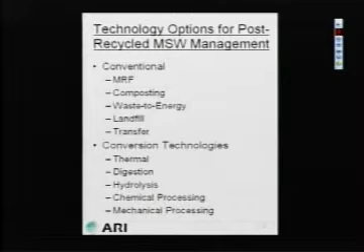Obviously, there are conventional means for managing municipal solid waste: recycling, composting, traditional waste-to-energy, landfill, transfer. And then we've listed the conversion technologies and the categories that we utilize to describe them: thermal, digestion, being anaerobic digestion, which is our focus there, hydrolysis, chemical processing, and mechanical processing. And this slide just tries to describe in a general sense what we mean by those categories.

So in the case, for example, of thermal conversion, we're looking at the application of heat to break down the waste and ultimately produce a synthesis gas, typically in a reduced oxygen or starved oxygen environment. And then the syngas can either be used as a material to make a fuel, or it can be combusted to make electricity. And typically the ash that's left over is vitrified, or it's a char, and that prevents leaching of metals if the vitrified material were used in an open environment.

Digestion, aerobic and anaerobic. Our focus has been on anaerobic digestion, which essentially is digestion, again, with a lack of oxygen. And we have more interest in that than the aerobic digestion process when we're looking at mixed municipal waste, because essentially it produces a biogas and less quantity of compost material for which you need to find a market.

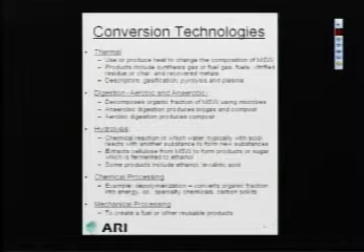Most of our discussion today is focused, by the way, on managing mixed municipal solid waste. We're not talking about food waste. We're not talking about green waste. Hydrolysis is a process where you extract the cellulose that's in the waste and convert it, typically in an acid hydrolysis process, to a sugar. The sugar, in turn, can be fermented into ethanol or other products. And then there are various chemical and mechanical processing means for separation of the waste and production of materials.

Just to give you an idea, there are many companies that are active in this business now. And we've categorized those companies, again, in terms of the thermal category, biological, chemical, hydrolysis, and other. This isn't meant to be an all-inclusive list, but it's the names that you'll see over and over again when you look at projects that are ongoing throughout the United States. Some of these technologies have commercial facilities operating overseas. Some have pilot or demonstration facilities, some of which are operating in the U.S., some overseas.

Why are public clients, at least the public clients that we're working with, considering conversion technologies? They're looking for environmental benefits, including reduction in air emissions, and in particular greenhouse gas emissions. They're looking to find enhanced use of materials, which results in less waste ultimately requiring landfilling. And they're looking for production of renewable products that have strong year-round markets, such as energy, electricity, gas, and fuels.

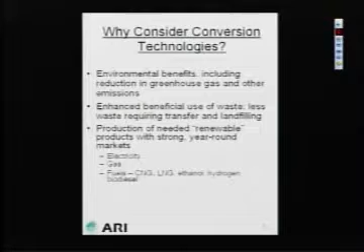This slide is a compilation of work that we've done in the projects in New York, LA County, and a little bit in Santa Barbara. And it is an example of some of the companies that have reference facilities. Again, some of these are commercial facilities, such as the anaerobic digestion list, which are commercial facilities but operating overseas. The gasification facilities are a mix of some commercial facilities and some demonstration or pilot facilities operating overseas.

And we've broken the thermal into 3 different types of gasification: just gasification in general, pyrolysis, and plasma arc. We'll get into that a bit more later. So it's important to recognize there are operating facilities commercially overseas.

There's always a question whether the waste that they're managing is exactly the same as the waste you'd see in the United States or in California. There's always a question as to whether the standards are the same environmentally as you would see in the United States. But there are actual operating commercial facilities. And also overseas, price is not always as low as you see in the U.S. for processing waste. But they are operating.

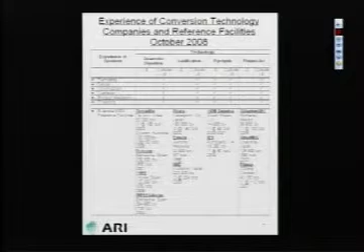It kind of reminds me, I've been in this business since the late 70s, early 80s, of a point in our history where we're looking now at introducing perhaps technologies that have evolved overseas into the U.S. In the late 70s and early 80s, when waste-to-energy technologies were first getting started in the U.S., it took some time to bring them in, and they came in, and then they developed, and there are 100 facilities or so operating now in the U.S. Perhaps we're at a similar point now when we're looking at conversion technology and bringing some of that technology into the U.S.

One of the benefits, again, landfill diversion. If you look at, again, the 2 categories, thermal and anaerobic digestion, typically the data that we have indicates that the amount of waste that you divert on a weight basis for the gasification processes is typically greater than 90% by weight. For the biological process, anaerobic digestion, typically they're in the 65 to 80 or 85% by weight basis. So if your goal is solely diversion from landfill, then probably you'd have a greater interest in the thermal conversion technology.

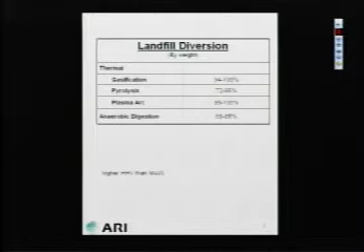In terms of net energy production, net energy being the amount of electricity that would be available for sale. So you generate a certain amount of gross electricity per ton of waste at your facility. You use a certain amount of that electricity to operate your facility, and the net electric output being the amount available for export and for sale. And these are the ranges of net electric output that we have been seeing from the data that we have. So on the gasification end, from about 400 kilowatt hours per ton.

Then you see a very high number on plasma arc, which is 1,250, but I have to caution you on that because that number is associated with a blended fuel, if you will, that has a much higher heating value than typical municipal solid waste. So it's not really a fair comparison on that slide. It's not that there's some magic in plasma arc that allows you to get that much more energy from the waste than some of the other gasification processes.

And part of the difficulty in looking at this data is that obviously the data has been gathered from facilities that operate on different waste streams. And so it's difficult sometimes to make sure you have an apples-to-apples comparison. And this is one example where the higher heating value of that fuel obviously affects dramatically the net electric output.

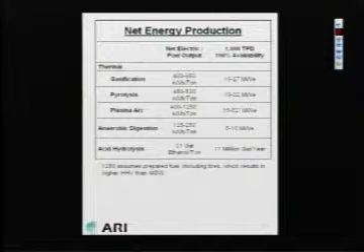Anaerobic digestion, you see that the net electric output drops off considerably. And acid hydrolysis, obviously, ethanol process. But again, if you're interested in renewable energy, the most efficient way of producing that from municipal waste, if you compare the thermal and anaerobic digestion processes, would be with the thermal processes.

We're doing a project in Massachusetts for the city of Taunton, and actually a request for proposals was released there last spring, and companies are now in the process of preparing proposals for a facility which will be a conversion technology type facility. But one of the things that we did for the Secretary of Environmental Affairs was to try and compare some of the emissions data that we had on thermal conversion technologies to the actual emissions data from municipal waste incinerators that are operating in Massachusetts now.

And municipal incineration in Massachusetts is very prevalent. Probably about half of the waste stream in Massachusetts goes through these 6 different incineration plants in the state. And typically what we found was that the dioxin emissions were up to 100 times, 2 orders of magnitude, less. Mercury, about the same, or in some cases up to 10 times less. Nitrogen oxides, approximately the same, in some cases up to 10 times less. Depends on the particular thermal technology you're looking at.

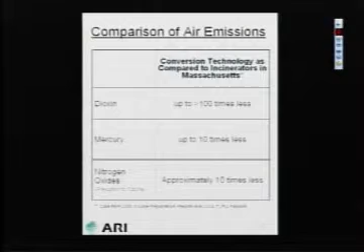But that's what we're looking at. So when people look at potential for better environmental emissions, they begin to focus on some of these particular emissions.

I wanted to spend a few minutes to give you a sense of what's going on based on our knowledge in terms of public initiatives in the United States. This is important to take a look at because probably 5 years ago, there were a lot of major entities in the United States, New York City, City of LA, LA County, the state here, that were just getting engaged and looking at conversion technology and doing evaluations of what might be available in terms of technology.

Several of those projects now have gotten beyond the study phase and have moved to the next phase of implementation, where companies have been shortlisted as qualified to respond to requests for qualifications or requests for proposals. Proposals in the case of the city of Los Angeles have been received. Offers in the case of the county of Los Angeles have been received and are being evaluated. So we're slowly moving beyond the study phase into an implementation phase, or the early stages of implementation.

This slide, I just focused on what we're aware of that's going on in California. LA County, 5 offers were received by the county in August. Currently, those are under review, and the county is looking to make a selection and to negotiate a project in the first quarter of 2009. Their concept was to match a conversion technology facility with a materials recycling facility or transfer station so that they could take the residuals from that recycling facility and run them through the conversion facility to further reduce the amount of waste that would go to landfill.

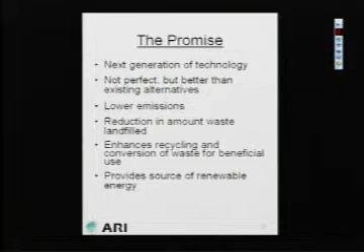So the promise could be the next generation of solid waste management technology. It's not perfect, but it appears to have promise of offering advantages to the existing alternatives in terms of lower emission, reduction in the amount of waste that ultimately you would need to landfill, and it enhances the recovery of materials for beneficial use. Many of these facilities have pre-processing facilities in front of the conversion process. And it does provide an opportunity for a source of renewable energy.

Some of the hurdles that we have seen: obviously, there isn't a commercial facility operating in the U.S. So public entities are somewhat reluctant to step out and be the first to invest either money or their prestige in putting together a facility like this. So a lot of the effort seems to be focused on doing demonstration facilities at a smaller level, and as confidence is gained in the performance of those demonstration facilities, moving on to a larger scale application.

We have found that there also at this point is some uncertainty on the regulatory side as to how these facilities should be permitted, what air emission regulations should apply in case of a thermal technology. Should they be treated like municipal waste combustors or not when you combust the gas from those facilities? On the solid waste side, how should the facility be categorized? Is it a recycling facility? Is it a thermal conversion facility? What regulations do we have in particular states that we'll use in the permitting process for those?

And we find, particularly in the East, that there's not a category of technology or a category in the regulations that specifically fits these technologies right now. Also, there's been some uncertainty in California as to how to define these technologies from a regulatory standpoint. It's also unclear on the East Coast as well as the West Coast as to whether these facilities should be eligible for diversion credits from landfilling, as well as whether they should be eligible for renewable energy credits.

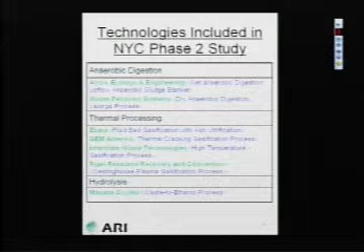The phase 2 study was an in-depth verification and validation of technical, environmental, and economic information from these companies. As I mentioned earlier, it was really the first and most in-depth attempt to get past that marketing hype, to begin to look at the mass and energy balances, to begin to understand what is going in and what is going out. Jim had mentioned earlier that there's a lot of inconsistencies in data out there.

You need to really understand what's the type of waste that's being handled. When companies talk about energy generation and diversion potential, are they talking about waste as received at the door, or are they talking about feedstock as prepared going into the unit? So these were some of the things that we were looking at in New York City.

From an economic standpoint, the city was looking at its future cost in the year 2014 when it envisioned a facility might be able to come online. And it looked at its projected export cost being on the order of $124 a ton at that point in time. So as we looked at the economics for these facilities, we looked at, could it compare advantageously to that?

For anaerobic digestion, we looked at both with and without the sale of compost, because for anaerobic digestion technologies, that is one of the issues that needs to be addressed. Is there a long-term, large, stable market for the sale of that compost material, particularly in the Northeast area? And those prices range from $56 to $80 a ton with the sale of compost, and a much higher cost if that compost had to be disposed.

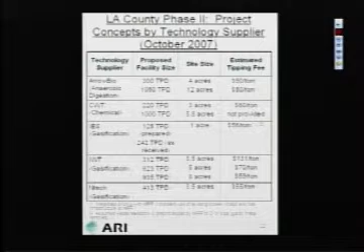And they also took a look at new technology suppliers that were not previously evaluated, again, holding all of them to the same standard. This represents the 5 companies that ultimately were selected and chose to participate. 9 companies were actually selected to participate, and after issuance of the request for information, 4 of them withdrew from the process. Again, following that review and evaluation process, 4 companies were shortlisted, and they're shown here: 1 anaerobic digestion company and 3 thermal companies.

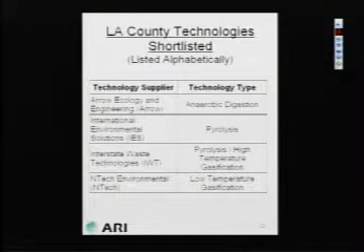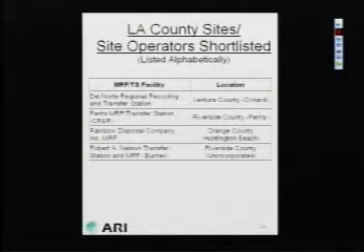Jim had mentioned that one of the unique features of Los Angeles County project was to consider the co-location of a conversion technology facility at an existing MRF or transfer station, in large part to take advantage of the synergies of that co-location and to further reduce the quantity of MRF residuals going to landfill disposal. This slide here represents the 4 MRFs that were shortlisted for consideration. In getting to that point of having 4 conversion technology suppliers and 4 MRFs, this outlines some of the key elements that the county looked at. Again, as I had mentioned earlier, we really needed to look at 3 main elements: the qualifications of the technology suppliers, together with the economics and the performance capabilities of the technologies.

In January of 2008, LA County issued its request for offers. The status of this slide is actually a little bit outdated. Offers were submitted in August of 2008. 5 offers were received, which represents offers from all 4 shortlisted companies, one of them submitting 2 offers. Those offers are currently under evaluation by an evaluation committee established by Los Angeles County, and the details on those will not be publicly available until that process is complete.

The next project of importance is the City and County of Santa Barbara. Santa Barbara actually started this process several years ago. They got to the point where they shortlisted several companies, and a project did not materialize at the time. What the City and County of Santa Barbara is looking to do is to divert waste from disposal at the Tajiguas landfill by placing a conversion technology facility at the landfill. The City and County are working collaboratively, and they started the process by establishing goals.

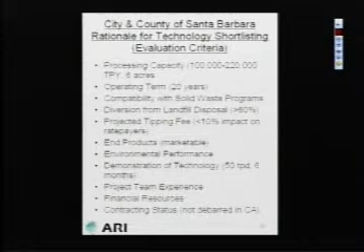They looked at the end markets, the products that would be produced and the markets for those products, environmental performance, demonstration of the technology. And finally, it looked very importantly at the project team and what the experience of that team was and their financial resources.

The next steps for Santa Barbara, as we mentioned, they're currently preparing their request for proposals and look to release that early next year. As they move forward in the preparation of that RFP, they're very active in a lot of side activities that go with that. They're looking to do an updated waste characterization study for the waste that goes to the Tajiguas landfill. They're looking to gather geotechnical information on the area where the project would be built.

And they're working very strongly with the local jurisdictions that might become part of this project. They're reaching out to the cities that use the landfill, which include Solvang and Buellton and Goleta, to find what their interest level is in this project and to educate them on these technologies and what this project might encompass. As they do that, they're holding public forums and educational seminars. They're meeting with environmental groups, and they've been doing this on an ongoing basis. So public outreach and education is a very important part and big part of the Santa Barbara project.

Proposals will be evaluated in the 2009 timeframe, with negotiations following that, leading into design, construction, startup, and operations. With that, I will turn it back to Jim, who's going to go through some representative photos of these facilities, and then we'll be available to answer any questions that you have.

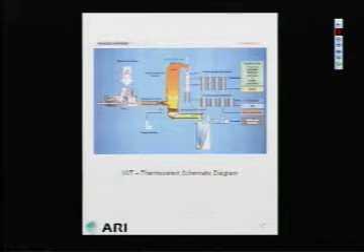I'm not going to go into this. That's a schematic of their process. This is not a plasma system. This is an example of the plasma system, using the Westinghouse gasification system in Japan. And this has processed over time municipal waste and auto shredder. We understand now it's primarily focused on auto shredder waste. It started operating in 2004.

This is an artist's rendition of Plasco, which is essentially a plasma system, and this was part of their proposal to the city of Los Angeles for a 200-ton per day facility. And I think the architect had a field day there when they came up with the look for that facility. So probably only in Los Angeles would you see a facility look like that which processes waste.

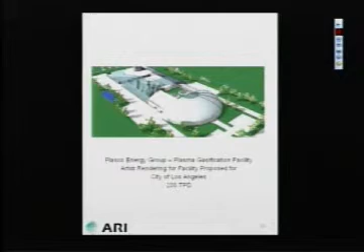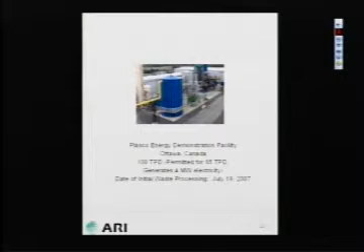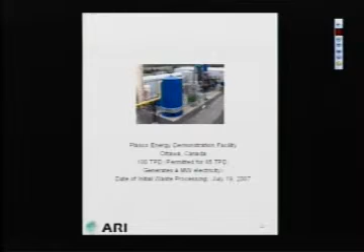Plasco operates a demonstration facility now in Ottawa, Canada, and it's just really begun to process municipal waste there within the last year. But they also process what I would call a prepared fuel, in that they mix the municipal waste with other waste materials. They've used tires in the past. They've used plastics, high concentrated waste plastics in the past. And they manufacture, if you will, a very high heating value fuel.

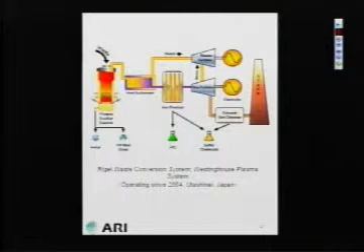This is just a schematic of what a system would look like. This was what was proposed as part of the New York City study for a plasma system, using, again, the Westinghouse setup. Shows a combined cycle system, a more efficient system for capturing the heat value of the waste than just the conventional steam system.

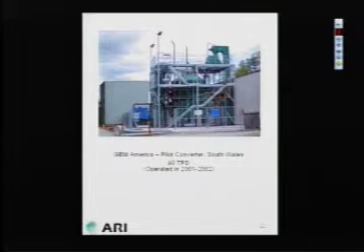Right here in California, in Romoland, you have company IES, which has put together a pilot facility at the 50-ton per day municipal solid waste size. Been operating on and off since 2005. It's a pyrolysis unit. It's a very simple setup, not in an enclosed building. It's set up as a pilot demonstration type facility.

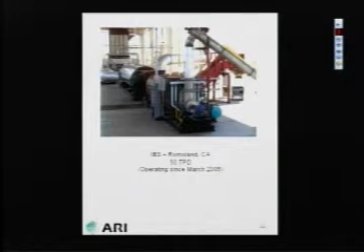And their intent was to gather intense data on air emissions to share with South Coast Air Quality Management District to demonstrate that they could meet all the conditions necessary to be permitted there for a commercial facility. A schematic of their process.

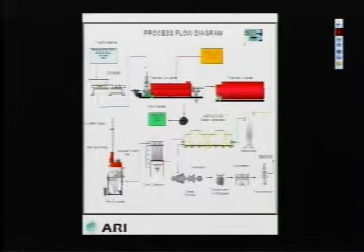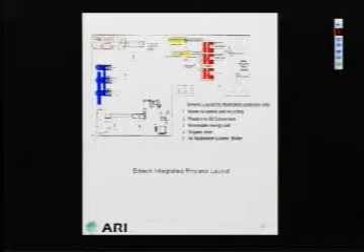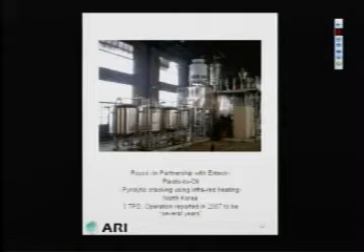Another gasification process, Entech, which is used overseas in the UK and Europe, is also in Asia. They use a front-end separation system for materials. This was what they call a kinetic streamer to separate materials. This was in the UK. We visited that. They also, which is kind of interesting, at the back end of their process, for the plastic that they recover, will convert that plastic into oil. We didn't visit this facility. This facility is in North Korea. We didn't have an opportunity to visit it.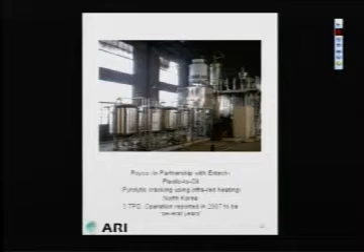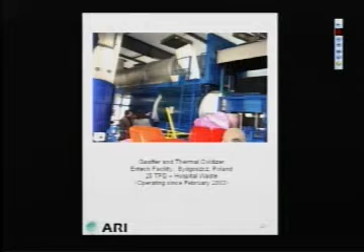This is just to show you the simplicity of a gasification system. This was the Entech gasifier that was used at a hospital waste facility in Poland. But you can see a 25-ton per day, small-scale facility. Served that hospital, also served to take the hospital waste from other hospitals within the region, so it was a regional facility. And they simply gasify in that first chamber where you see the two people standing in front.

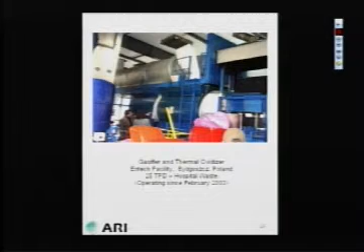And the gases are actually combusted in the chamber above. And then you have a steam heat recovery system that follows that, and typical air pollution control equipment. In Malaysia, they're operating a 67-ton per day gasifier on municipal solid waste.

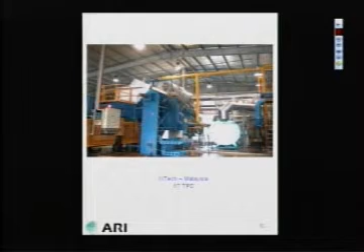Switching over to some of the biological systems, we did have an opportunity to visit the ArrowBio system, which is a wet processing system, which is outside of Tel Aviv in Israel. This is what they refer to as their demonstration facility. It's 110 tons per day on municipal waste. And for any of those who have visited Israel, they don't recycle to speak of in Israel on the home front. Very, very little. So when you have mixed municipal waste going to a facility like this, it's essentially all of what would be generated at the household.

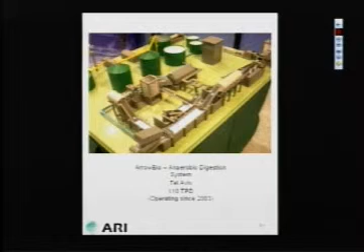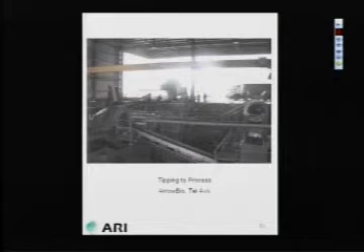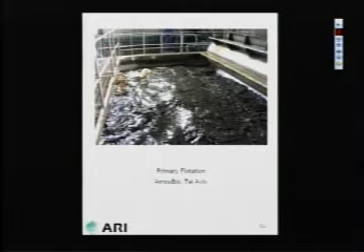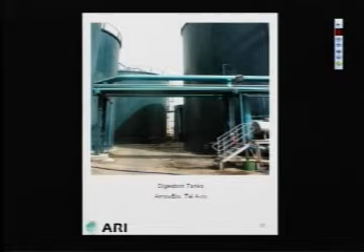They shoehorned this facility into an existing transfer station next to a landfill because they were given that space. Hard to see in that, but what the trucks do is they come in and, there's no tipping floor, they back up next to the entrance to this processing building. The waste is dumped directly into a water bath, which they use to separate the lights from the heavies. The liquid fraction is digested anaerobically. They're using the digestate or the compost from that process as a soil amendment material.

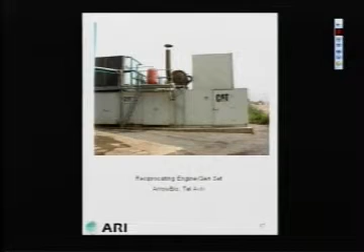They use the methane gas and run it through an engine and generate electricity. They have since moved on and have built a commercial facility, a 300 ton per day facility outside of Sydney, Australia. I'll just run you through a few pictures of that. This was when it was under construction in 2007. You can just, as I scan through these, see how the facility comes together.

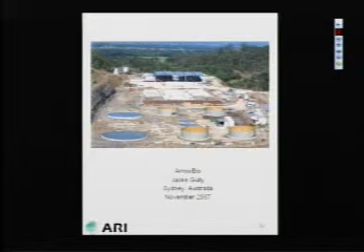The tanks are the digestion. The building in the back is the waste processing. And that's what it looks like. That's a 300 ton per day facility. It was commissioned on July 4th of this year. They're currently in startup mode, as we would refer to it in the U.S., and they should be in commercial operation, they see it, in the first quarter of '09.

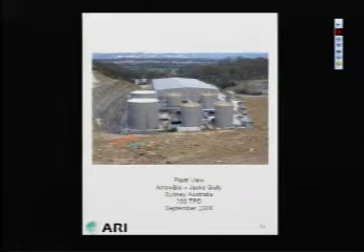Another picture of the same facility. Another. And you can see some of the engines in this picture. They're again capturing the gas here and combusting the gas to make electricity. Inside the building, on the left-hand side are the water vats, and then the light material comes up into the trommels.

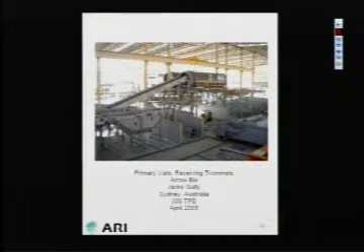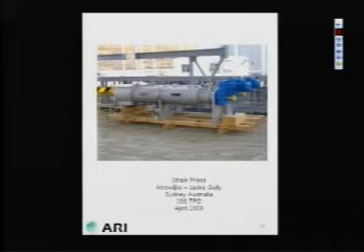Just another picture of the same trommels when they were further complete. They basically press the digestate at the end to remove some of the liquid. Just another picture of the trommels when they were complete. Water in the water vat. This is just as they were getting into the startup mode. That's why everything was so clean.

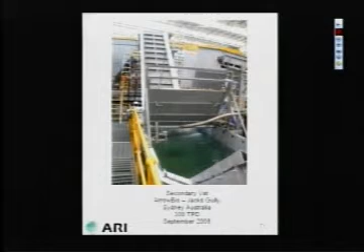And so essentially it produces oil products at the end. That facility has been operating for a few years. They were attempting to begin to get into the municipal waste business, but they haven't yet achieved that. And that concludes our slideshow.